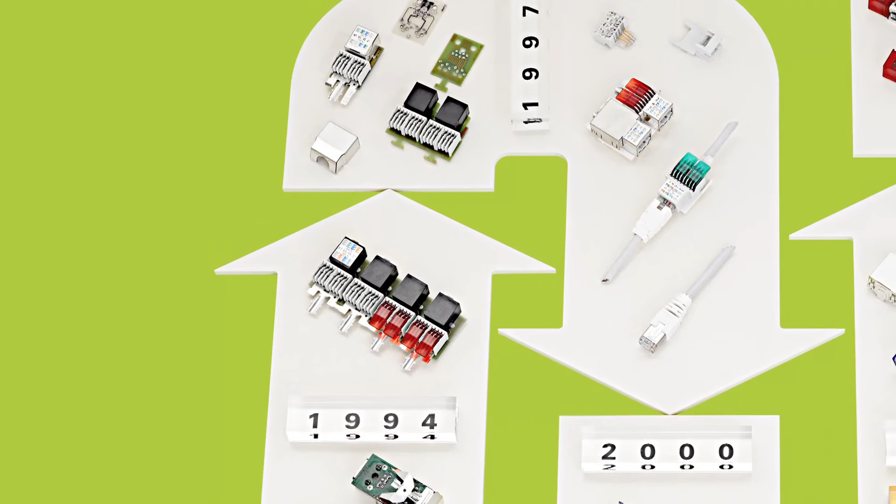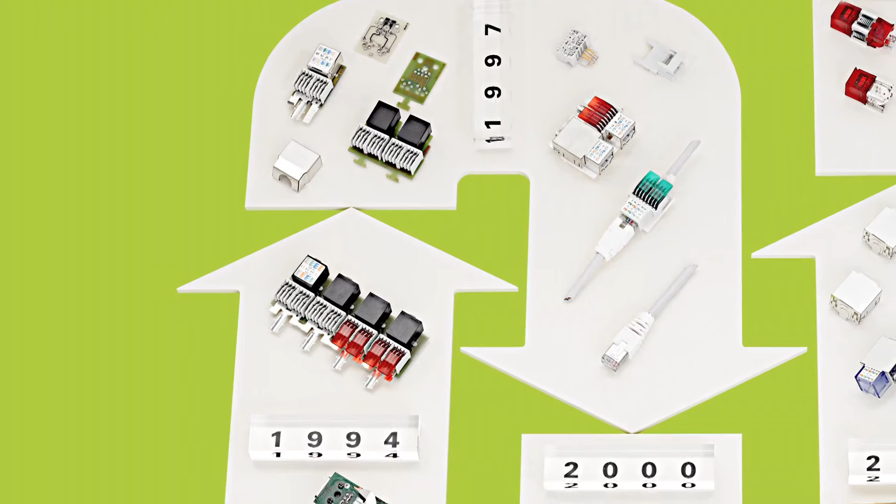Since 1992, R&M has continually evolved the RJ45 module. It started with the first simple module featuring the R&M developed Easy Lock termination. The Cat5e module represented a big technological leap by integrating the termination technology and jack into one part. The Cat6 module continued this development by innovatively implementing the principles of high-frequency technology.

As the result of this 20-year continuous development of RJ45 technology, in 2010, R&M released the new red Cat6a module, which meets all of the requirements of the IEC Cat6a component standards.

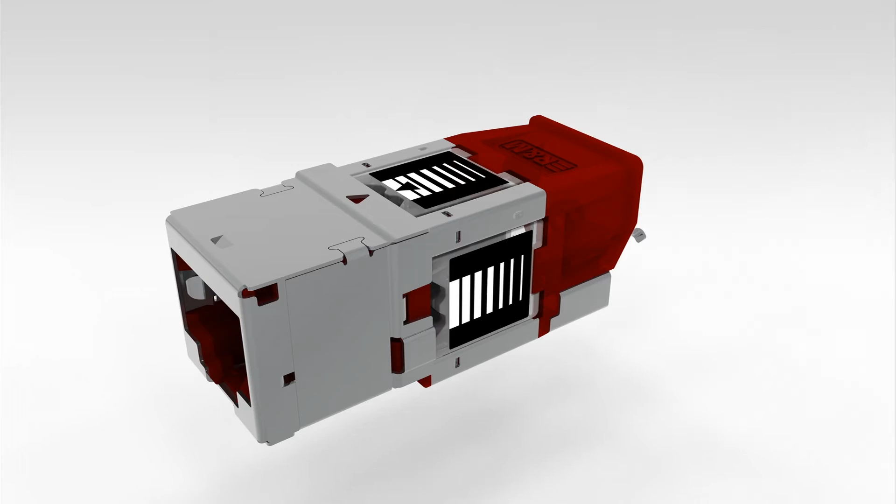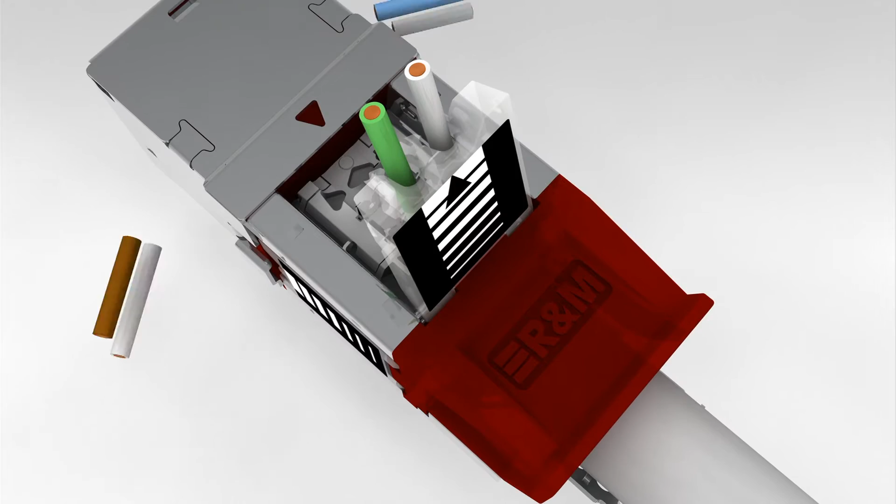The Cat6a module from R&M consists of two main parts and features an especially small size, continuous pair shielding in the termination block, and the automatic cutting of the wires during termination. These features enable an RJ45 module with a never-before-seen performance headroom.

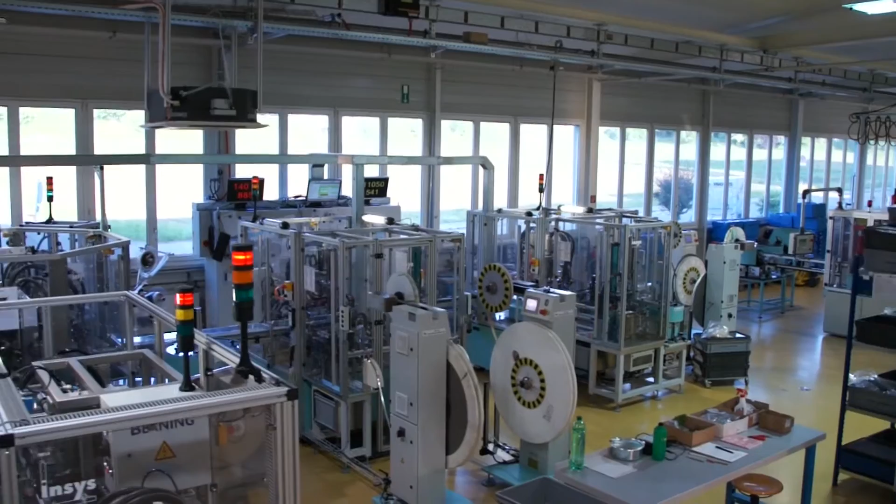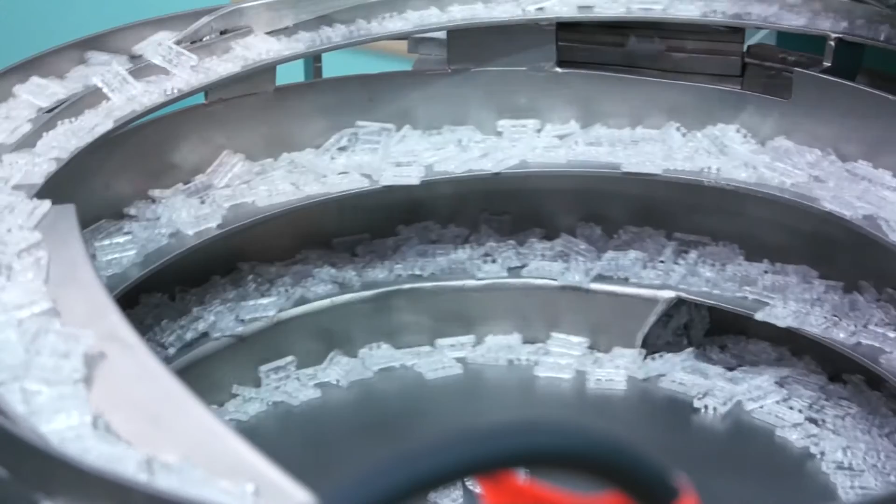Since autumn 2010, the Cat6a module has been produced on a fully automatic production line at the company headquarters in Switzerland. The cable handling part is assembled on this part of the production line. The transparent levers are first placed in a spiral conveyor where they are aligned in the correct position and put on the linear transport system.

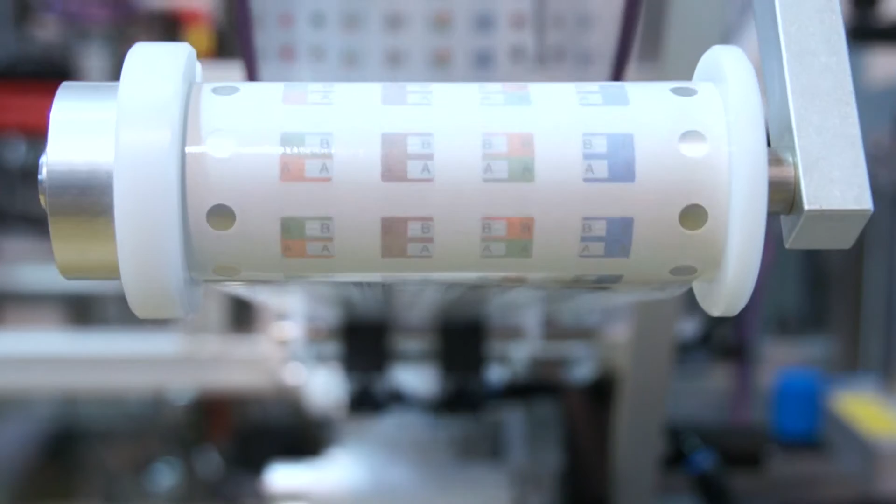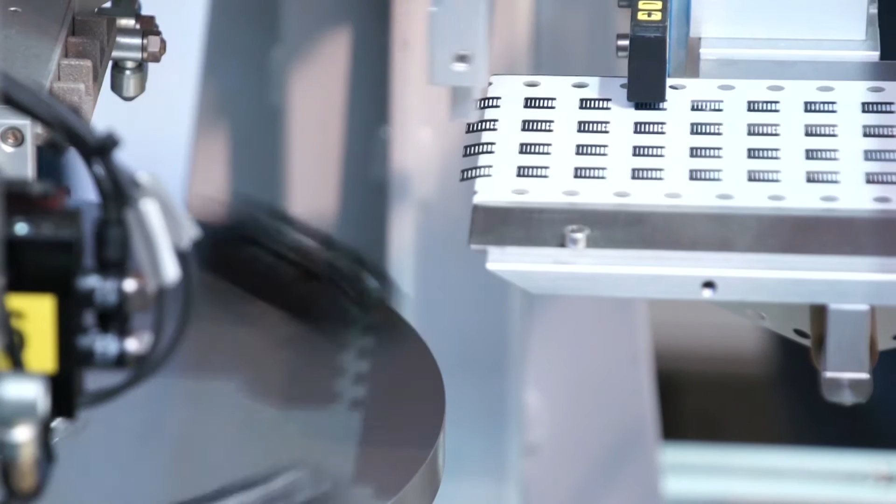4 levers are then placed into the fixture on the first rotating index table. A vacuum head retrieves the pre-cut labels with the wiring information from the roll and affixes them to the levers. The print of the label will now be visible through the transparent lever, ensuring an easy installation.

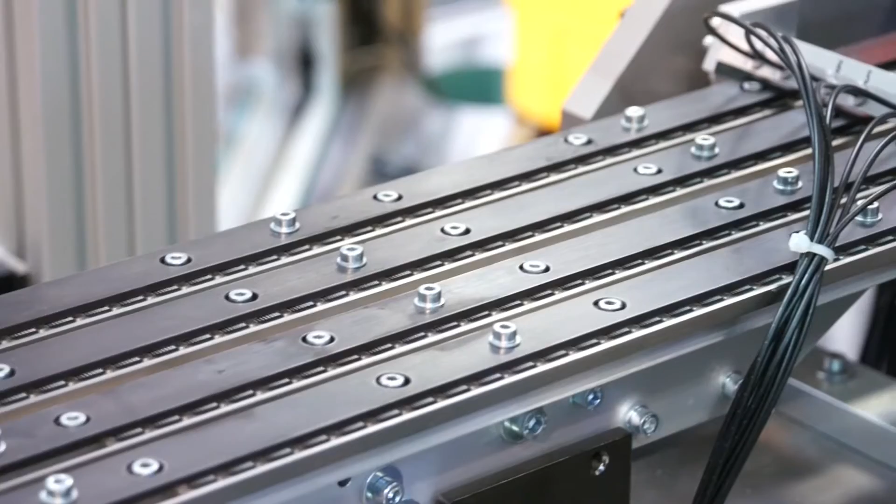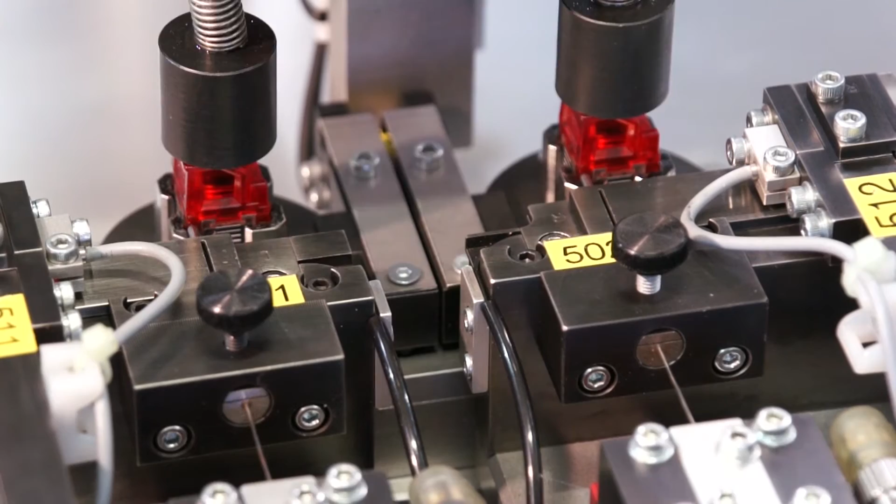The 4 differently labeled levers are then placed in separate channels of a linear transport system. The levers are placed in the 4-fold rotating fixture and the cable housing is mounted on top. Thin stainless steel pins are then accurately inserted through the small holes provided in both the cable housing and the levers, thus establishing a stable and robust hinge.

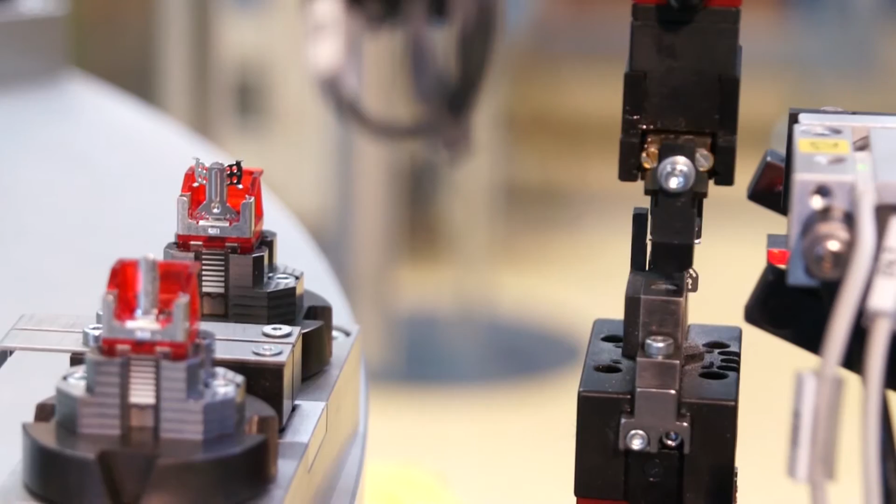For shielded versions, the shield bayonet is now mounted on the cable housing. In the final step, the optimized strain relief is inserted into the plastic housing. The adaptable sidewalls ensure a stable and consistent performance during operation.

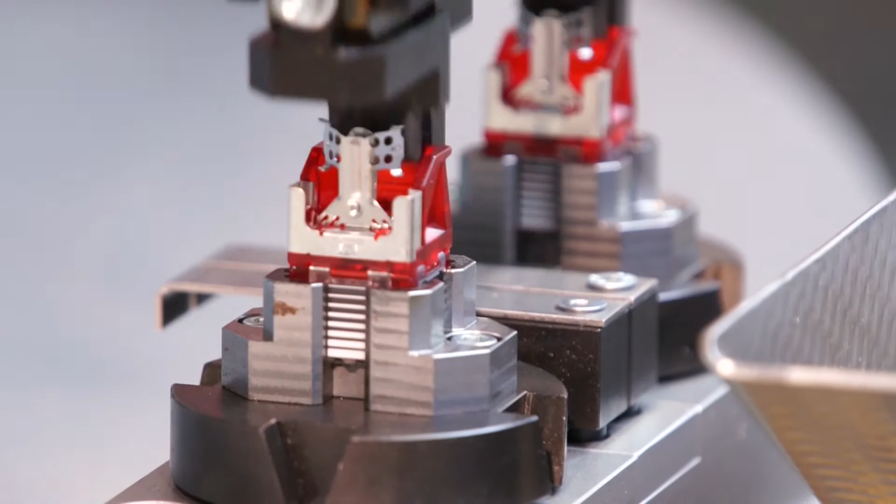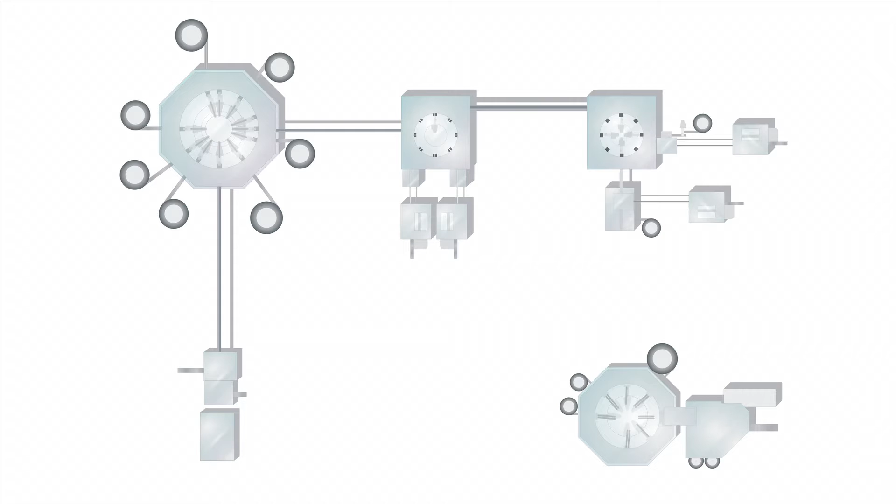At each stage, sensors have checked that each step has been performed flawlessly. If an error occurred during the assembly, the faulty parts are sorted out at the end. The correct cable housing parts will then go on to an automatic packaging line for distribution into the different variants and packaging sizes. The jack part is produced on a second production line with 4 assembly stations.

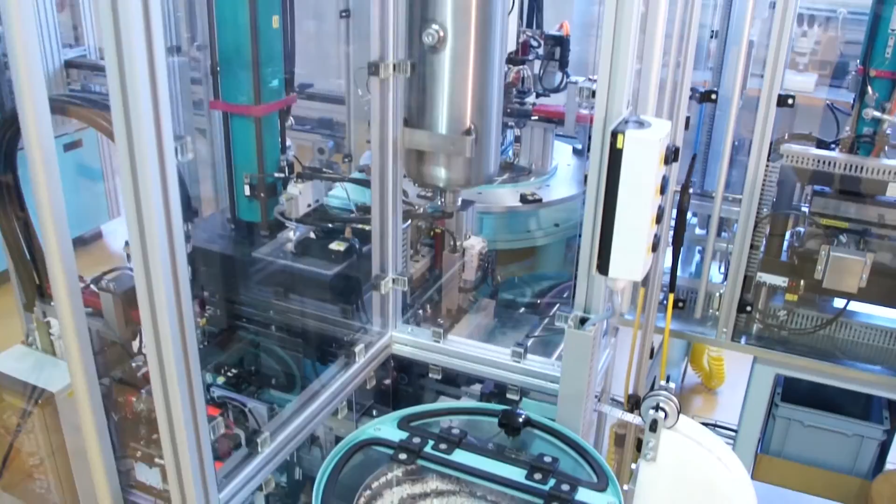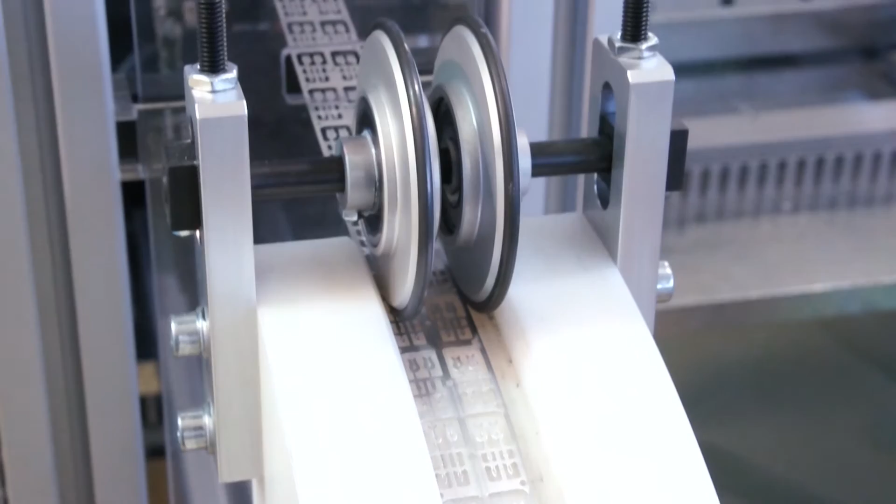The core segment, which contains the IDC and the cutting blades for 1 wire pair, is assembled in the first station. The IDCs are first placed in the plastic holder. In order to precisely move and work with the small plastic parts, they are placed in a fixture. In the first press, 2 IDCs from a pre-cut die frame are bent and inserted. The newly developed IDC enables an extremely wide range of supported wire sizes.

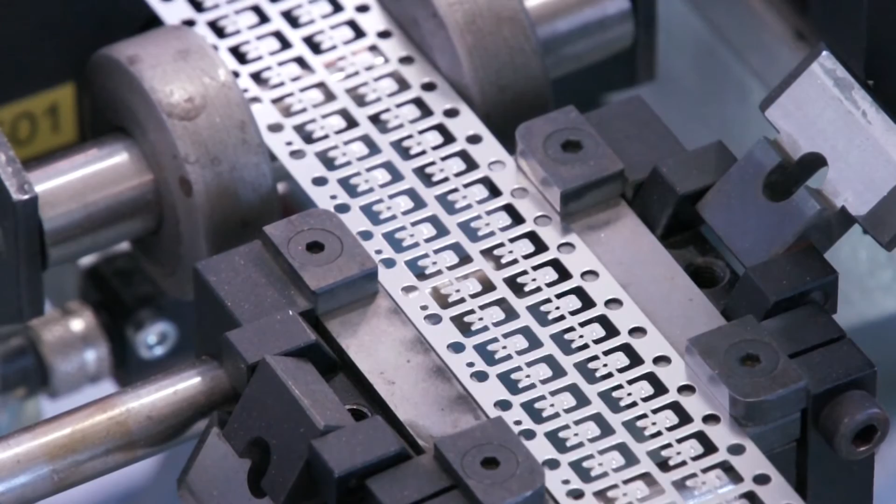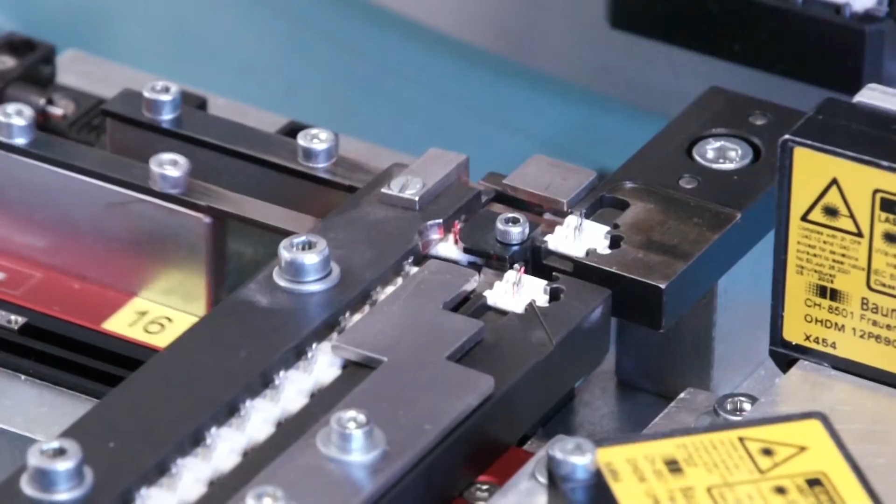The pre-cut stainless steel blades are stamped out in the second press and placed in the corresponding plastic piece. The blades are used to automatically cut the overlength of the wire to a defined length. On the rotary indexing table, the 2 populated pieces are joined together and then placed on a transfer system, which also serves as a buffer between the stations.

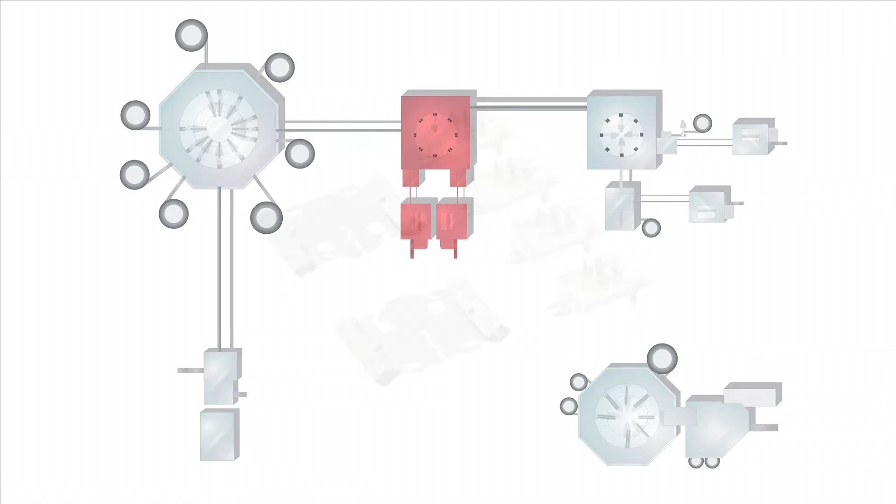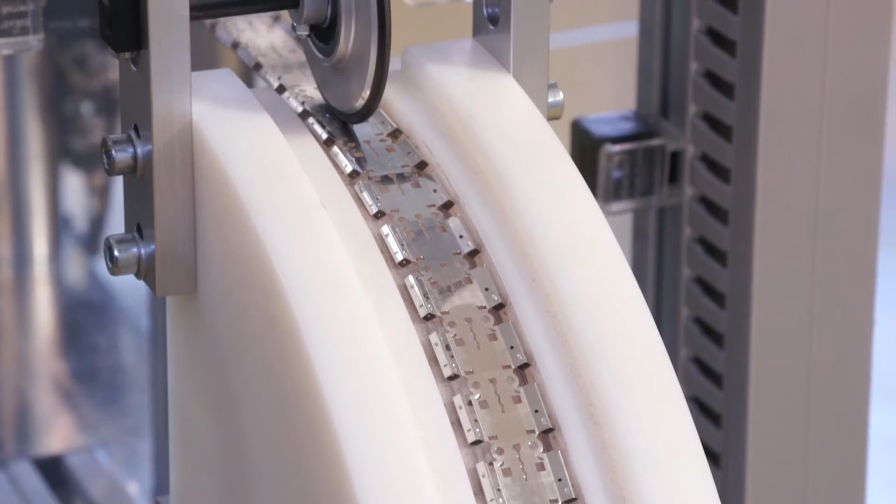In the second assembly station, 4 core segments are assembled to form the complete termination block. Through the central shield cross, the termination block is divided into 4 independent chambers. The innovative shield cross ensures that no crosstalk can occur between the pairs in the termination block. For each module, a front and back metal shield cross is cut from the frame and placed on mounting pins in a rotary holding fixture.

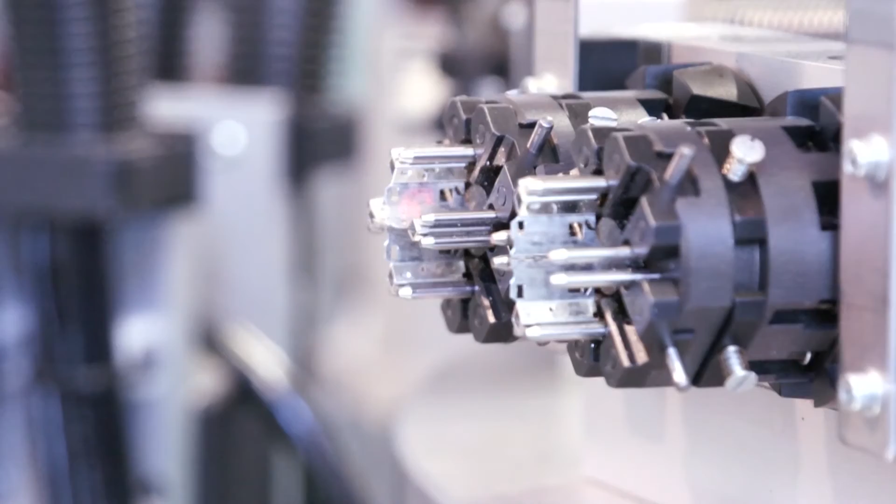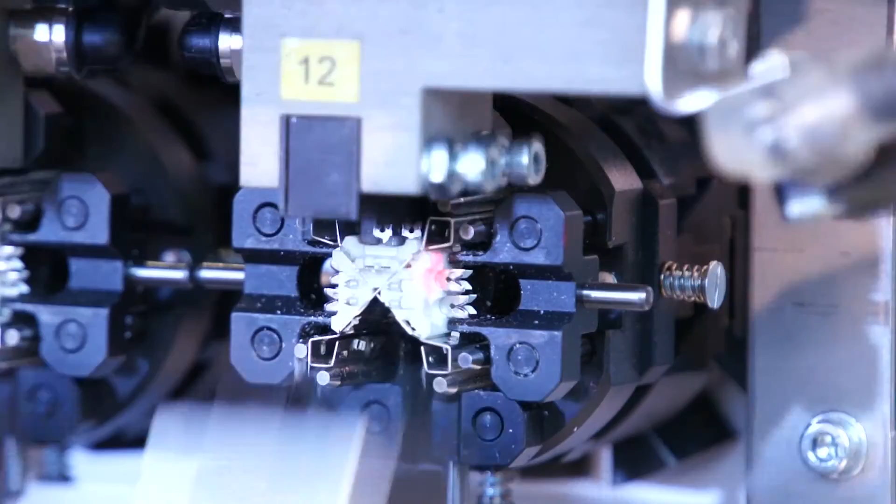The core segments are now taken from the transfer system and assembled to a complete core. A gripper ensures that the core is completely snapped together before it is placed on the transport band to the next rotary indexing table. The transport band also serves as a buffer between the stations.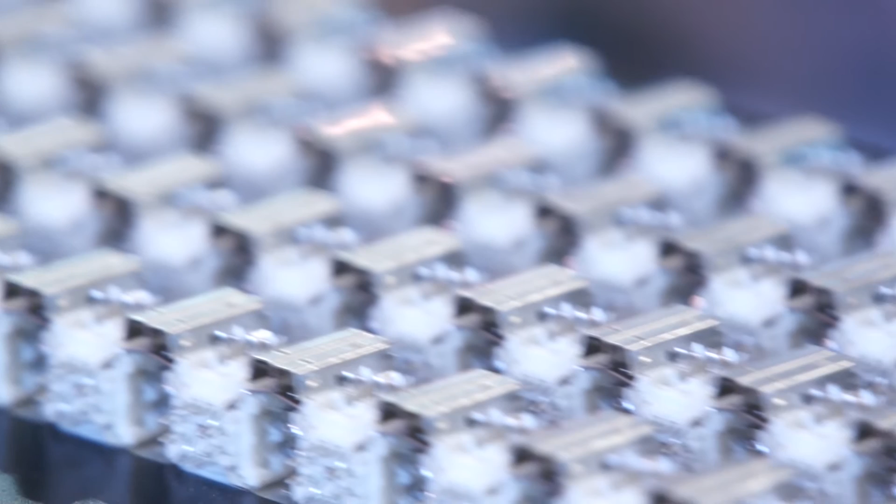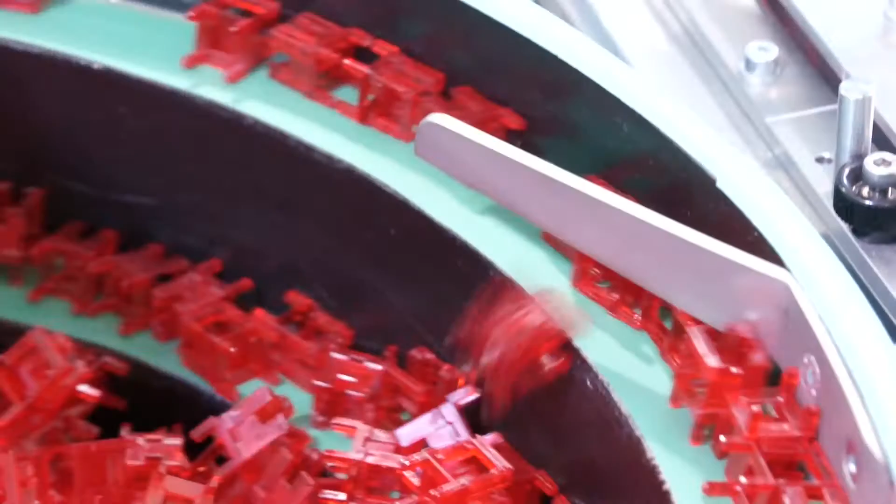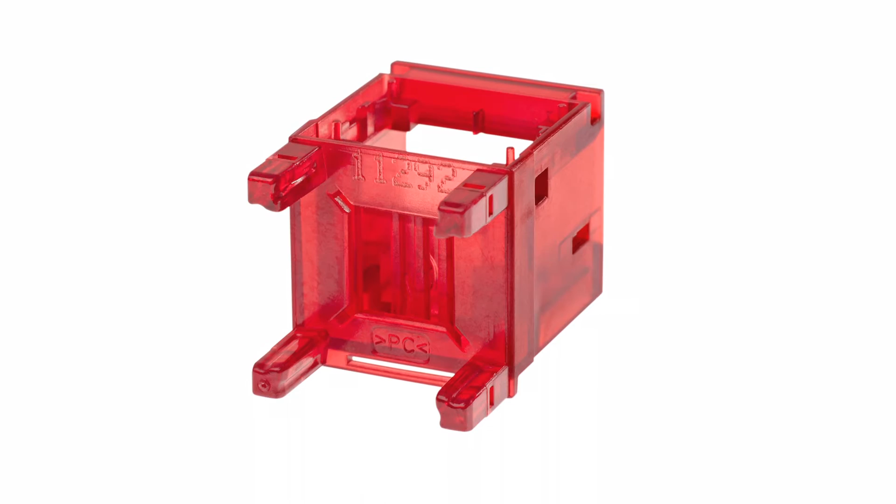In the third assembly station, additional parts are mounted on the termination block to complete the jack part, which is then tested. The assembly process starts with the separation and feeding of the jack housing, which is then placed in the fixture on the rotating table. As the housing is moved from the transport system to the rotating table, a laser labeling system burns the production date into the housing. This production date ensures traceability for each module.

On the next station, the contact set and the corresponding compensation elements are delivered and placed in the jack housing. The pre-assembled contact set contains several compensation levels and defines the transmission technology. Together with the innovative pair-shielded termination technology, it is responsible for the excellent transmission characteristics.

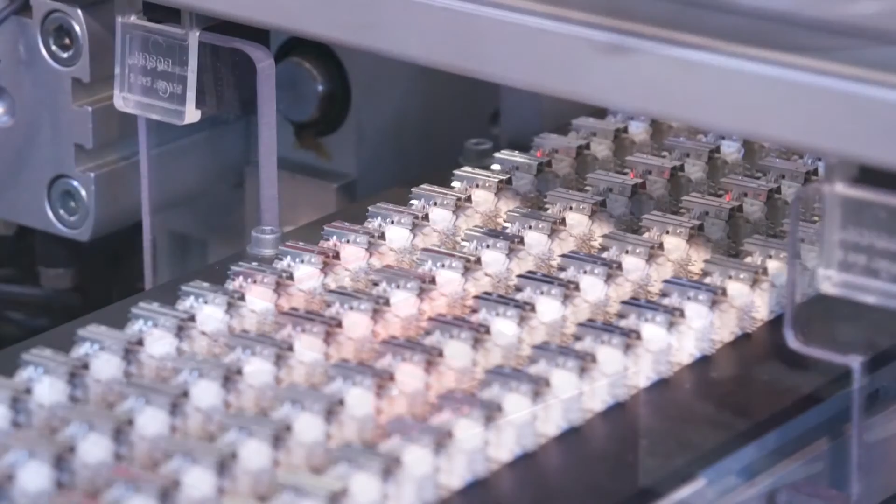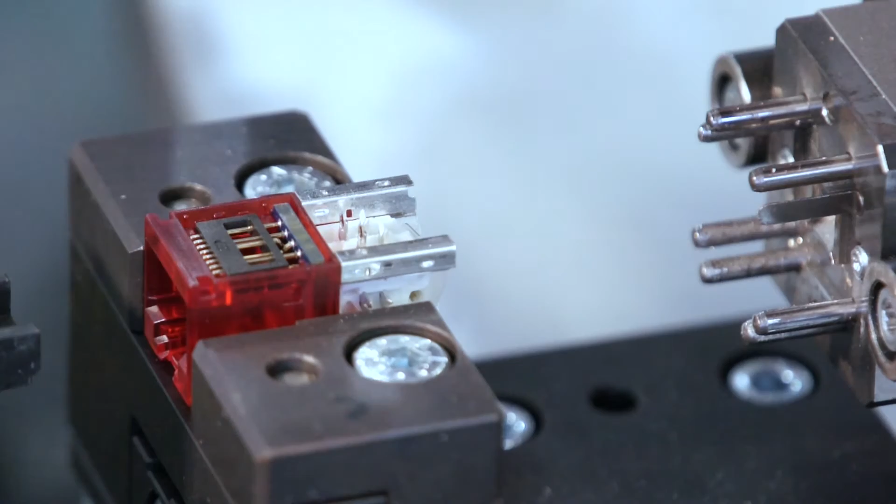The pre-assembled termination block is taken from the buffer system and pressed onto the contact set. An eye-of-the-needle contact establishes a robust connection between the termination block and the contact set. A force versus distance measurement monitors the pressing procedure and ensures that each of the 8 contacts is correctly connected.

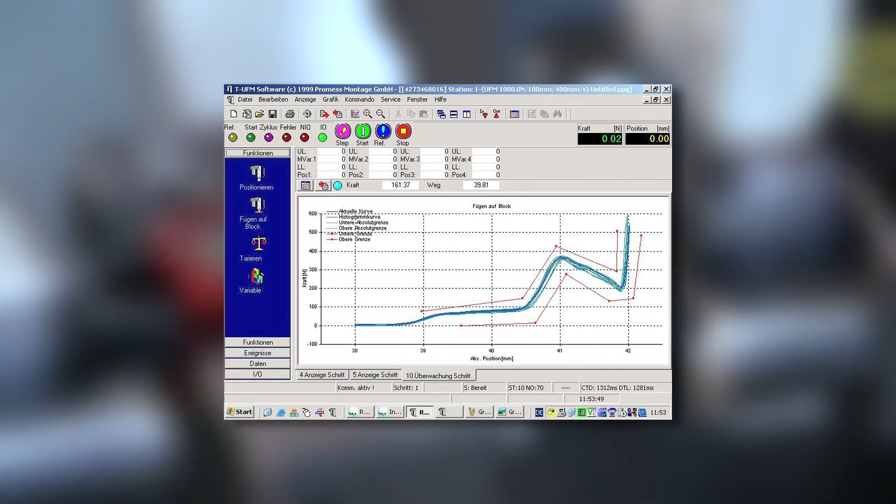The force distance curve shows an exactly defined typical progression of a correct connection. With this curve, the system can reliably recognize if a single contact is missing or bent. Using a hot melt deformation process, the contact set is fixed in the housing. The mounting of the housing cover and, in the case of the shielded jack, the shield housing, completes the assembly process. For quality assurance, various functional tests are conducted.

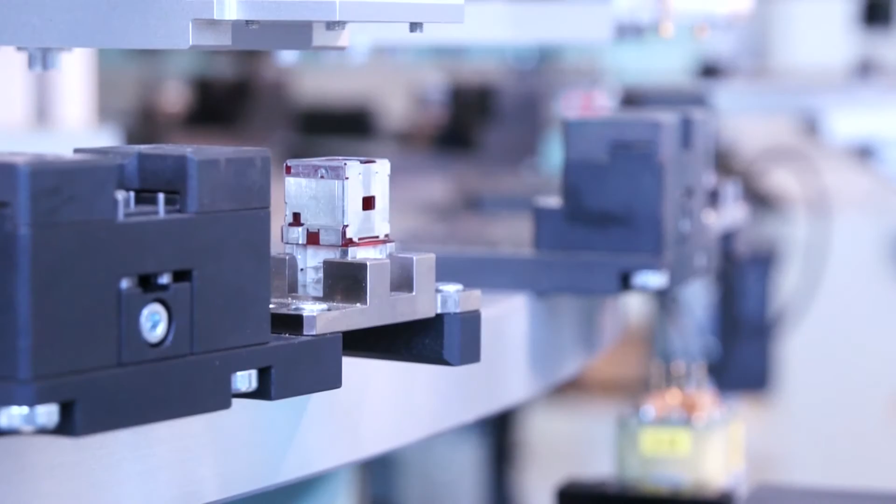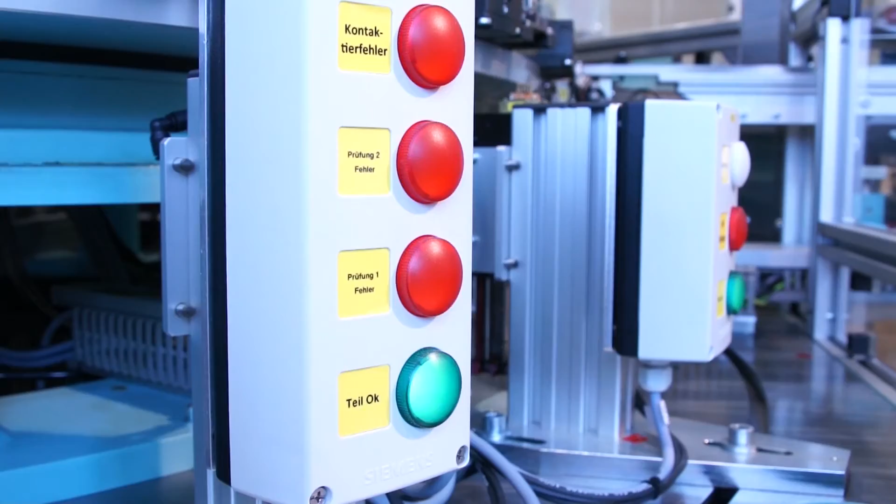In the cycle time of the production line, each RJ45 module is tested for the following: electrical continuity, dielectric strength to 1000 volts, high-frequency characteristics. The test heads used correspond to those defined in the standard for measurement labs.

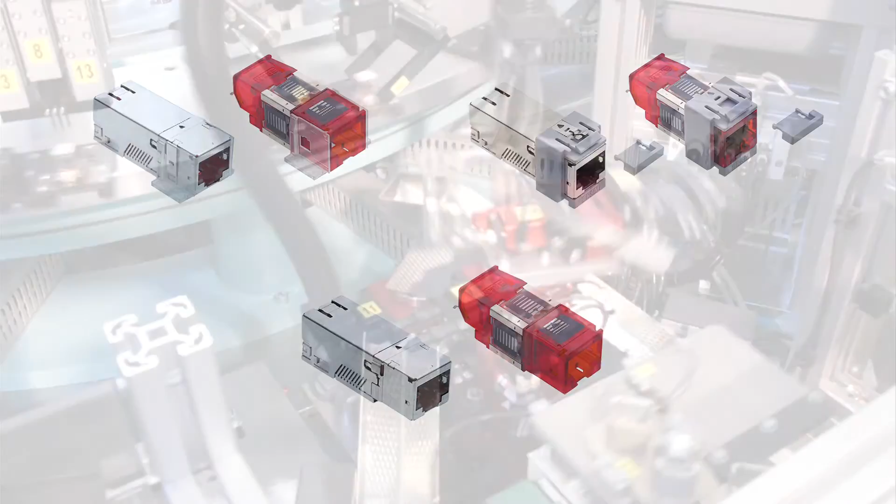After the testing, a dust cover is mounted on the module to protect the jack from dirt during transport and installation. Depending on the version being manufactured, a corresponding adapter is mounted. The good parts are placed on the transport system to the 4th station.

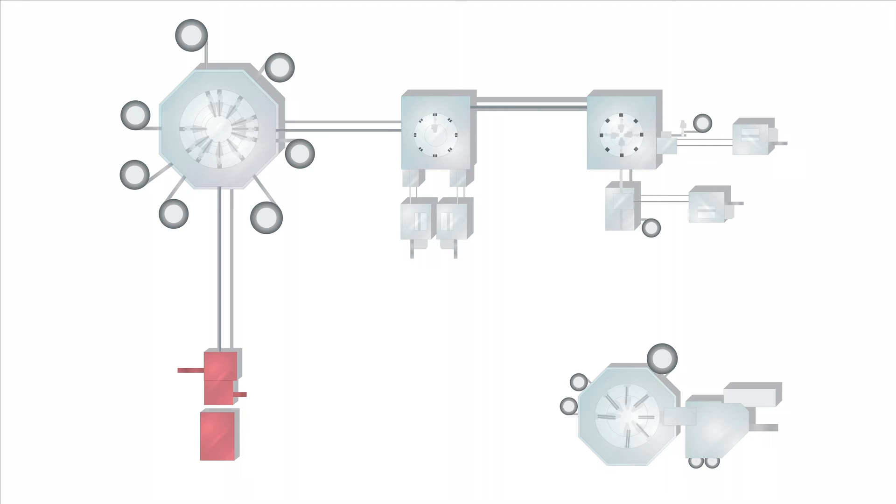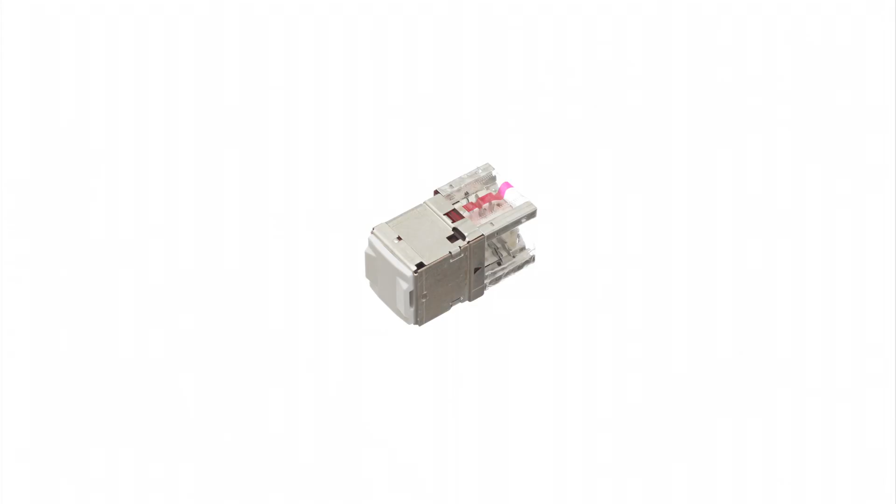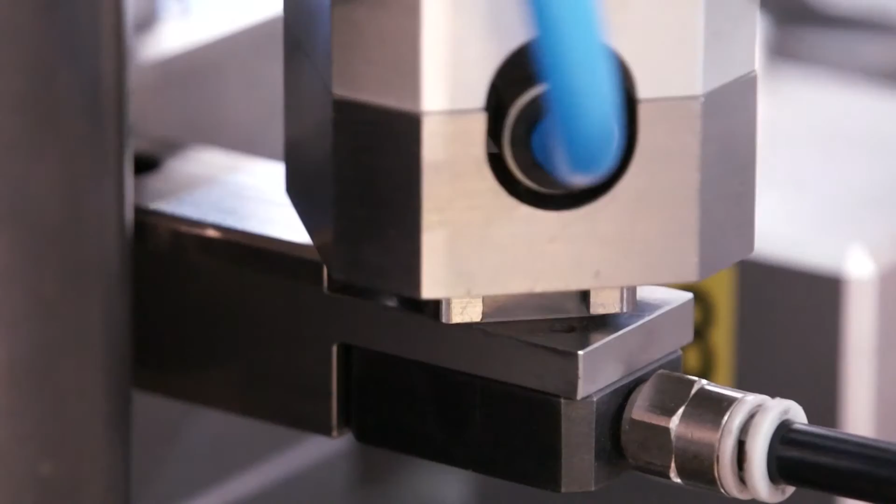The 4th assembly station consists of a linear transfer system over which the modules are transported from station to station in fixtures. In this station, a metal cap and protective sleeve are mounted on the jack part. For shielded versions, an additional metal cap is snapped onto the pyramid of the termination block. This unique metal pyramid enables the foil shield of each pair to be contacted directly to the module shield.

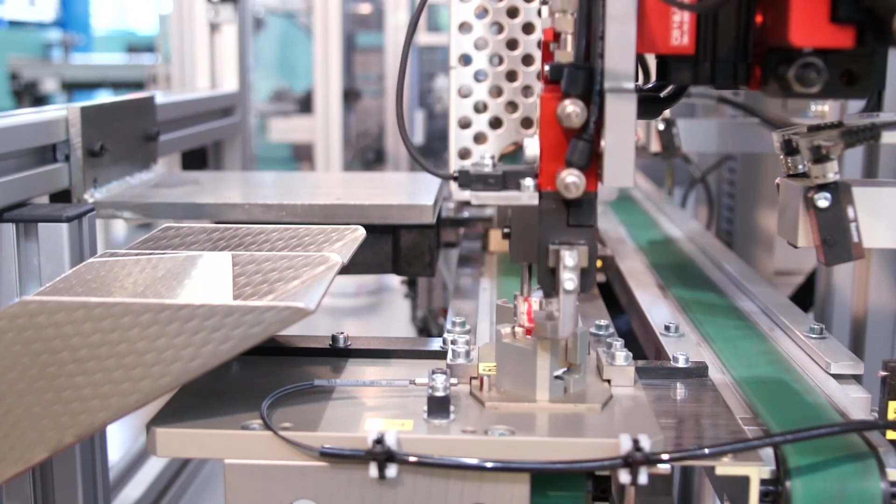In the final 2 steps, a plastic protective sleeve is placed over the termination block and heat shrunk with hot air. The protective sleeve ensures that the IDC contacts, as well as the blades, are not damaged during packing and shipping. As with the cable handling parts, the jack parts will then go on to an automatic packaging line for distribution into the different variants and packaging sizes.

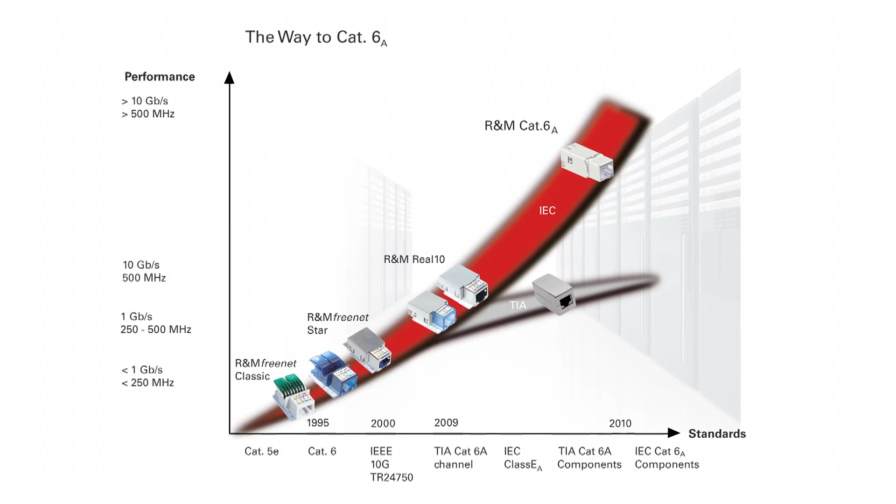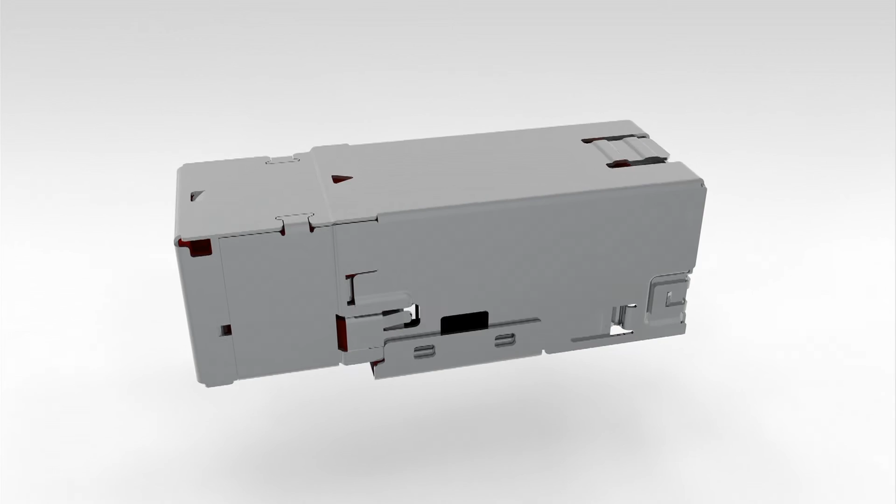With the new Cat6a module, R&M has once again shown its commitment to utmost quality and reliability. At the same time, the unique and well-thought-out design of the module represents a technological leap in RJ45 connectivity, resulting in the highest performance available in this format.